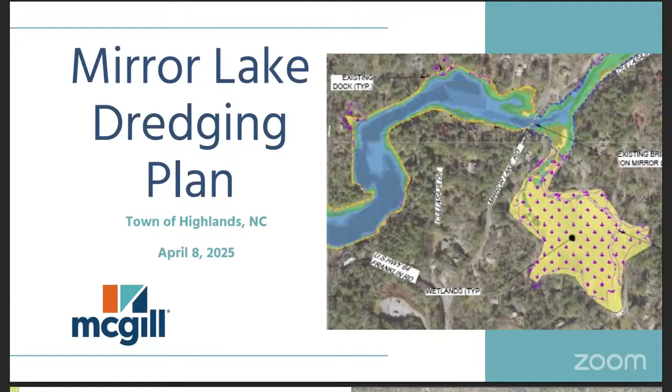So I think there's a lot of things that have gone into where we are today. And today is yet just the beginning. The preliminary engineering report brings forward this information for consideration, brings forward recommendations, which we'll get to at the end of the presentation. And yes, we will be looking to the town to provide us their direction based on the recommendations that we provided. So with that, next slide, please.

The existing conditions here I went through in brief detail just previously. I wanted to point out the two slides here. One of the things that was of particular interest to a number of the folks that we were working with in the town were both the water depth and the sediment depth that's currently in the lake system. We found that the water depth ranged from as little as inches in certain areas in the wetland and certain areas in the riverine section, up to about 18 to 20 feet in the open water area of the lake.

There are some pockets of significant sediment deposition within the riverine section, the lake section, and the wetland section. And those are shown in the lower image. The hot pink areas that are showing up on that image are showing where a lot of the sediment has accumulated over time. Most of your upper reach in your riverine section currently is at an overall depth of sediment of anywhere from 1 to 4 feet.

So if you take that backwards, what was the original lake, what was the original channel depth in that area? Generally 4 to 5 feet of open water is what we expect was the original condition prior to the sedimentation coming in. As we go into the lake section, we have similar areas that are very shallow. You can see just off the bridge, there's an area where there's been a sediment deposition that has actually gotten to a point where it's above water some of the time.

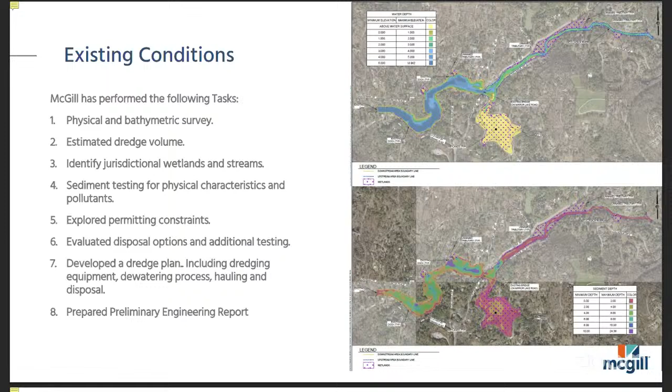Most of the sedimentation information that we have in that area suggests that that area was still a shallow area, likely 4 feet or less of open water, but it was open water at that time. Over time, sediment has accumulated from storms flowing through the area, being brought into this basin. And as that water drops out into an open area, the sediments have a tendency to drop out in that same area. That's why you're seeing a lot of sedimentation accumulation in this area, especially because it necks back down before it goes into the lake. And that has a tendency to concentrate that sediment dropout in that area. So next slide.

We also took a look at utilities. The utilities that we have identified, we talked with the town engineer. We're able to find some information on water lines and sewer lines that will have to be addressed as part of our dredging plan. Some of these cross the open water, particularly the water line coming here near the bridge, another one that's coming across the open channel here, sewer lines that come through the area. So one of the challenges is that we know approximately where they are horizontally. We don't know vertical depth on them because we don't have as-builts. So that'll be part of what we address in our contract documents for the contractor.

They'll have to come in and locate those specifically before they start doing their dredging activities so that we know that we're going to protect those areas. And we may end up having to adjust dredge depths in those areas depending on where the utility turns out to be, so that we can protect the utility and we don't end up exposing the utility.

If it was put in with the intent of being buried, we want to leave it buried. We don't want to expose it to the forces of running water flowing through it and potentially disrupt the joints on the pipe, et cetera. So we'd like to find better information to go into the documents, but as of right now, that's the information that we have available.

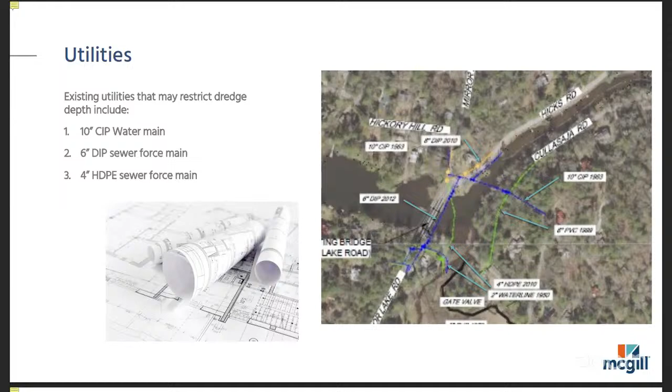We also shared this information with the phase one contractor that's out there now. During our discussions and trying to get more information about exactly how they were approaching their phase one work, I asked if they had these utilities. They did not, so we provided that information to them. So hopefully that will avoid any mishaps with their work, because most of their work is occurring in these areas immediately upstream and downstream of the bridge. So with that, next slide.

Okay, so dredging methodology. One of the things that we do when we're asked to produce a dredging plan is we want to gather more information about the characteristics of the water body and the depth of sediments that are there, but also the type of sediment that's there. We want to do some sampling. The type of sediment tells us a lot about how contractors will likely approach the removal of the sediment.

Heavy granular sediments like sands are more easily removed with certain methods, and the light, silty, fluffy type muck soils that have a tendency to accumulate in the open water areas are better addressed with different types of methodologies. The phase one contractor is using hydraulic dredging for their work, as far as we know. At least that's the information they shared with us.

And that's likely a fairly good approach, being that most of what we found in this area was that these sediments are of the lighter silts type materials, and those are better addressed with hydraulic dredge. We did sampling at the bottom of the lake near the dam, at the mid-lake area here. We did sampling here in the riverine section, and then up at the top end, we did another sample.

We found most of the riverine section, as you would imagine, is granular soils, because a lot of the energy is still moving those lighter soils downstream. As you get into the open water area where you've got greater water depth, a lot of that granular material is dropped out in the river section, and it's carrying those light silts into the open water area. So the bottom area in the lake is predominantly light silts.

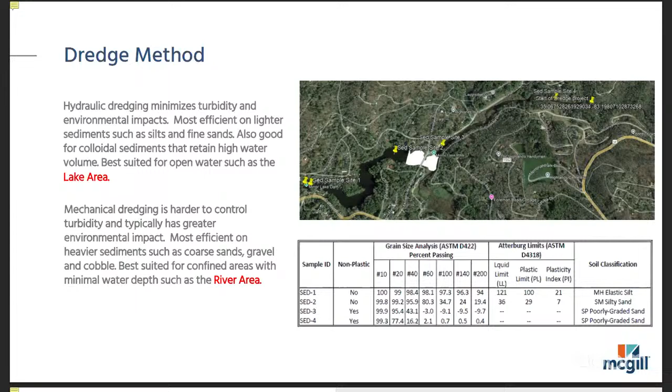This here shows some of the sampling information that we did, and we ended up working with a geotechnical engineer to obtain those samples and take them back to their lab, do testing on them, characterize the samples for us. And we'll talk a little bit more about other sampling that they did for us in a moment here.

Disposal options. And that's another big issue with dredging. The first half of the dredge job is getting the sediments out of the water body. And then what do you do with it once it's out of the water body? How do you handle that material? You've got to somehow take it into a truck, take it into a sedimentation bag.

You've got to dewater those sediments, especially in the lake area where you have the lighter colloidal sediments. They like to hold the water, so it takes longer to dewater them. So what we're expecting the likely approach in that section is going to be hydraulic dredging, pumping the material through hoses up onto a land area into bags that are pervious.

The silt material will accumulate in the bag, and then through gravity, it'll leach out the water, and the water will return back to the river. All the sediments will be captured in the bag. And we expect that that's going to be a similar operation to what phase one is doing. That's exactly how they're approaching phase one right now.

They're working in the area that is, and I'll show it to you on the next slide where we've got the river up again. They're working a small area right along the Cullasaja River Drive. That area is suitable for them because they're only moving 5,000 cubic yards of material. And they're doing it in a very, I'll use the word relaxed. They're not approaching it to try and get in and get as much done as quickly as they can.

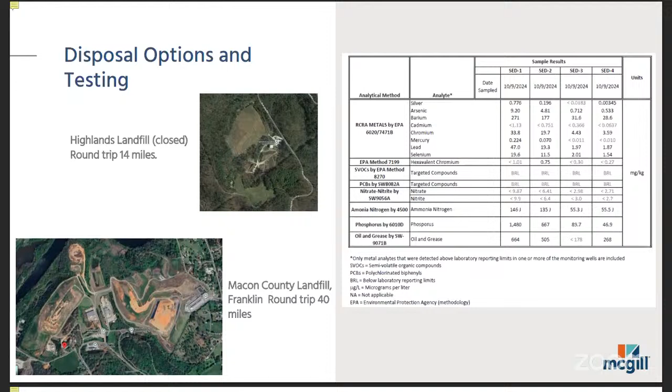So that's good news. It allows us to utilize these two nearby sources for disposal and try and reduce the overall cost of the project as we move forward. Next slide.

All right, permitting. One of the things phase one did was they dredged a small enough area and they limited the amount of impacts in wetlands so that they didn't have to go through a state permit process. When we go through this process for doing the entire lake, we will have to address that state permit process. So that'll take us more time to accumulate the information, prepare the documentation to submit for review, and for them to review, comment, and provide information back to us. And I think it's a good time for us to talk a little bit about the types of permitting that we expect on the job.

For the lower area, in the lake area, where we expect that the contractors will likely end up using a hydraulic dredging approach, we will not have to have an exhaustive amount of permitting. The permitting will be relatively straightforward, partially because the methodology for hydraulic dredging typically is less impactful to the environment. And it causes less turbidity, so it's easier to control that and not create water pollution problems as part of the dredging activities. So that goes through the agencies relatively quickly.

We expect that it's likely going to be about a 3 to 4 month permit process, which is typical of environmental permitting in North Carolina, working with both the Army Corps as well as DEQ. When we get into the riverine section, hydraulic dredging becomes impractical because we're dealing with much less water. Hydraulic dredging requires a large volume of water to move the material through the pumped pipes.

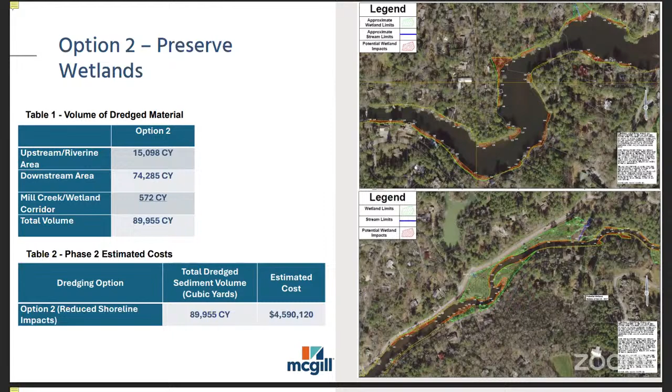And I guess let's go on to the next option. So the next option is what I refer to as 2A. It's a hybrid option. It looks at how do we do the most amount of dredging that we think we can do to remove the most amount of material from the lake and thereby benefit water quality. That was kind of the primary initiative of why this money came forward to the town to begin with, is to try and benefit that water quality that's going downstream into Lake Sequoyah.

So with that, we can reduce. Let's look at trying to capture the volume of material throughout the entire area. But when we get into those deeper sections of the lake, maybe we don't go down to 18 feet. Maybe we go down to 14 feet. That leaves sediments at the very bottom of the lake, but they're a lot less likely to get churned up and moved downstream when they're that deep in the lake to begin with. So that's one way of trying to reduce overall volume of material.

One of the other benefits is, now I'll talk a little bit about Mill Creek. When we first were brought into this project, it was shared with us that there was an initiative to try and open up Mill Creek to recreation, kayaks, canoes, being able to navigate through the wetland. Right now, there is a channel that goes from the lake all the way up to the culvert underneath Cullasaja Drive. But that channel is interrupted by beaver dams and falls and other things.

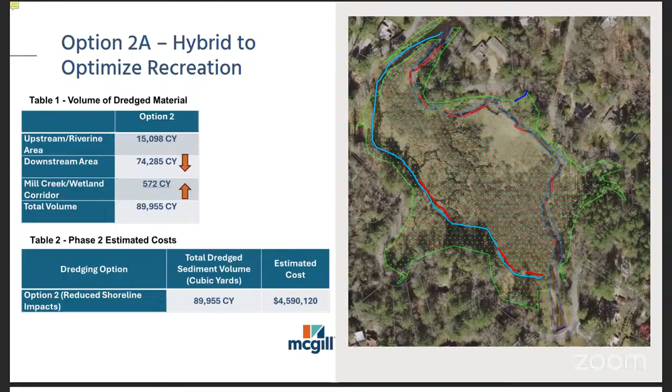And it also gives us a little bit of viability on trying to adjust the dredge volumes based on the pricing that we're getting. So with that, we'll talk about this next slide. Our recommendations. From our perspective, based on the information we've been provided from the town administration and the prior reports that I've seen, the focus that's been brought forward on phase 1, we felt like the option that best addressed all of the different initiatives and strategies that were emphasized was option 2A.

It also gives you the most flexibility because not only does it allow us to go in and try and maximize recreation and adjust dredge quantity to be able to accommodate the additional cost of the wetland impacts, but it also allows us the ability to set up bid alternates, which is another recommendation that I have for this project. Even if we're moving forward with a phase 2 and then a phase 3, right now we're recommending phase 2 is the open water lake portion. And because that's the easiest one to permit, we get permits first, we get that underway.

Then we move towards phase 3, which is the River Reach section and the Mill Creek section. That's where most of our wetland impacts are. That's where most of our problems are going to be as far as turbidity and other issues the agencies are going to be concerned with. And that's the one that's likely going to be a 9-month process for permitting.

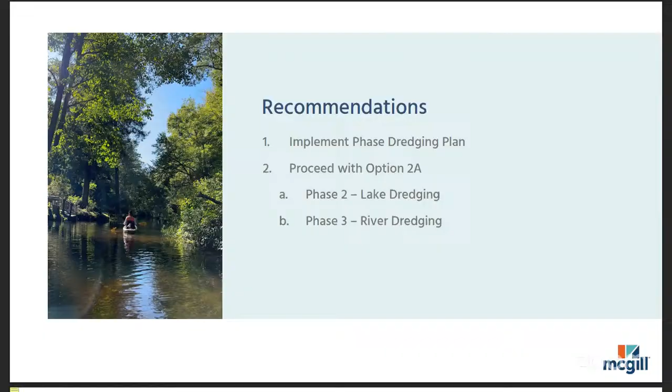We go on to the next slide, please. This was something I didn't put in the report, but we have looked at a schedule for all of this and how this all plays out. So we're expecting, if the town gives us approval to move out into design and permitting in the next 30 days, then we could be looking at getting the phase 2 design underway in April. We could be ready to bid that project based on our assumptions right now as early as September of this year. I think that works out fairly well with phase 1.

My understanding is phase 1, where it is now, getting started in March, probably is going to end up being done in June or July, is what I would estimate. And you may have a better date than I do for that. But then it allows you to come in, basically button all that up, finish out all the work with phase 1. Contractor can remove all of their materials and all their equipment. You can go out and do a new bid in September. That puts us under construction by December of this year on phase 2. Then go to the next slide, please.

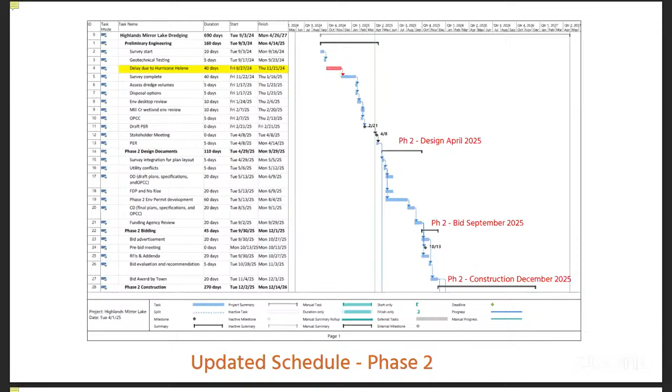So then this is the end of that construction period here. This is where phase 3 comes in, running in parallel up front on the design, but having a longer permitting period pushes the rest of the project out. So we end up with bidding in February, construction in April of next year, and completion of construction near the fall of 26. So again, it allows the town to have a little bit of a break between phase 1, phase 2, phase 3. It allows you to manage this.

If you're finding that you're having problems or delays associated with the construction due to weather or other things that were unanticipated in phase 2, you can push phase 3 out and choose not to do it. If you find that phase 2 costs too much money and you don't have the money available to do phase 3, then you can choose to delay phase 3 to a later time when you've had additional funding come available.

So one of the things we're trying to do all the way through this dredge plan is come up with options for the town, recognizing that if you find a single path and you get on that one path, in construction, something always goes wrong. It never happens exactly as you anticipate it will. So we want to try and find off-ramps in different locations through the schedule, through the bidding, through the alternates process.

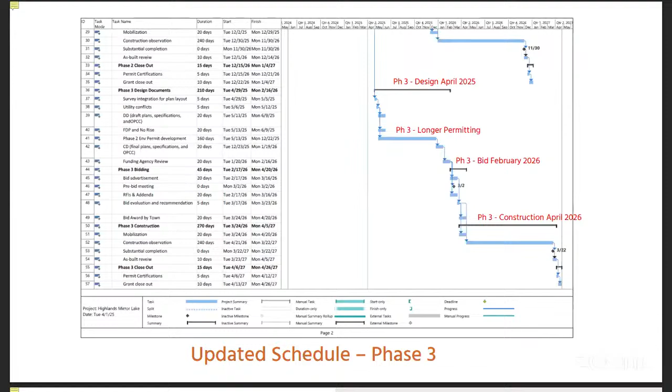Last slide. So future considerations. This wasn't part of the report, but I think it is important for the town to consider, the Lake Association to consider long-term. There are things that were recommended in prior studies. The drainage plan for the town, implementing sedimentation basins, try and reduce the volume of materials that are moved downstream and deposited in the Mill Creek wetland area.

The management of the golf courses and the different areas that contribute sediments in the upper Cullasaja. All of those things take time and take the cooperation of other parties to achieve. So long-term, are you going to be able to achieve all of the things that you'd like to do, all the strategies and action plans that were put forth in that study that was done? It's highly likely that even if you are able to do it, it's going to take a long time to

get it implemented. So coming up with a maintenance dredge plan that you work on today and through the time that you're doing this dredge program now would put you in a better position to look at 5 years down the road, 10 years down the road, being able to come back in and have a self-funded dredging program. Lots of details on how that gets done and who pays for it and all that.

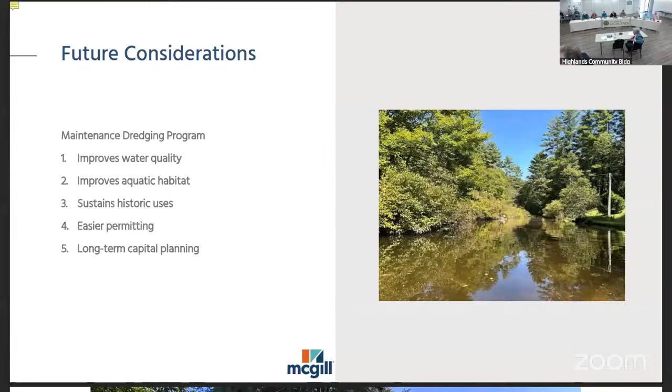And recognizing, as I said before, the work that's being done in the upper watershed may take years to implement, and even if it's diminishing over time, there may be a sediment load that's continuing to come into this water body for the next 10, 15, 20 years. You want to try and manage that as best you can. That would be a good place to put it.

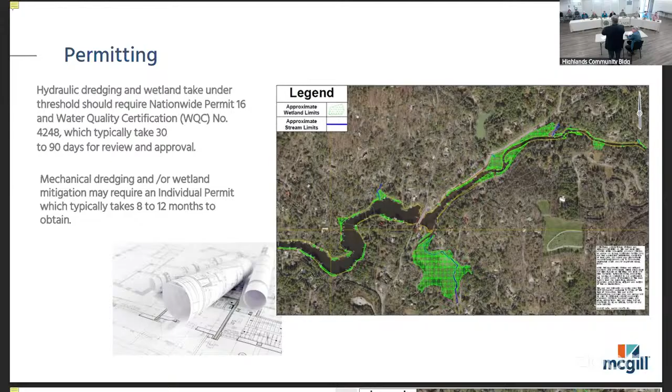Jurisdictional based on your interpretation of the decision? I'm not sure that, if it's growing off... So those wetlands were outlined not by me, but our environmental scientists who are up to par on what all of the current regs are and what's considered a wetland, what's not, regarding both Army Corps and DEQ. And when we go out and do a wetland designation, we're not the ones who have the final say. The agencies come in and review what we've done, and they say, yes, that's a wetland, no, that's not a wetland. So the ultimate call is on the agency, not on us.

We're just giving you our best professional opinion to try and anticipate what the cost is going to be when we impact it, or if you choose to impact. But the Corps has designated wetlands, right? The Corps has not come out to do the designations. We're in the preliminary stages. We wouldn't have the Corps come out and do designations until such time as we have direction from you on what it is we need to do. And then we move forward with design.

As part of that design, we'll submit documentation to the Corps and to DEQ saying, these are the wetland impacts we expect we're going to have. At that time, they'll come out and do the jurisdictional verification. Yeah. Thank you. Thanks.

I just had one question, it's a strange question. Initially, you said historically, Mirror Lake was dredged? Or is it just dammed and backed up? Dammed and backed up. Okay. I thought you said something about it was way, way deep. No, to my knowledge, it has not been dredged. We didn't find any information in our research of available data that suggested that it had been maintained or dredged in the past.